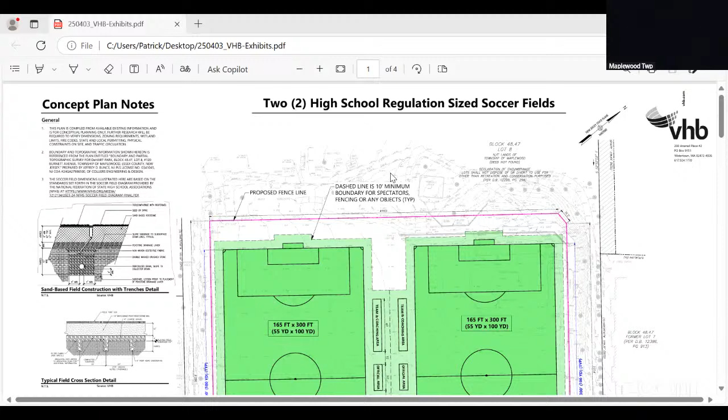I want to point out a few things with what we're proposing. The fence line that you see on the east, the west, and the south are all where they exist today, so none of that is going to change. The area that's going to change is up here where the softball field is.

There's also a perimeter drain that runs around the site. What's happening right now, following up on what Paul had mentioned, we looked at the existing soils. There's clay underneath, though there have been other projects that had rehab, repair the field. Once enough water gets into the clay layer, it has nowhere to go.

So what we're proposing to do is a drainage system that's going to run underneath the field. On the side here is some typical sections. Keep in mind, we're in a concept development stage, so none of these are completely engineered yet. There will be pipes, the size and the distance between each one, that's to be designed when we get into it.

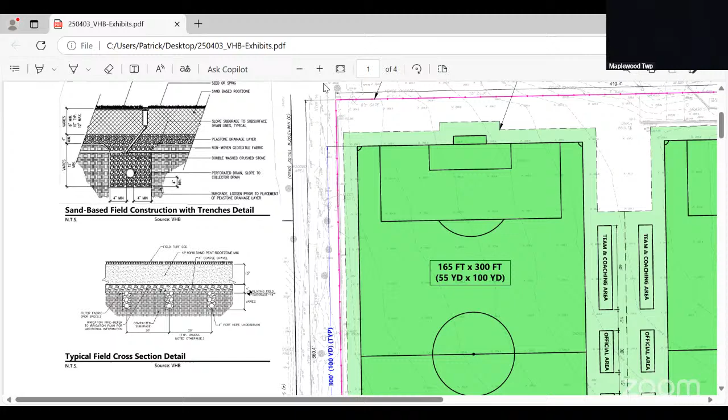So this is one of the typical cross-sections of what that would look like. You would have a drainage pipe surrounded by stone. This would be your irrigation line. So there will be trenches throughout the field that would have these pipes, and then we're going to have filter fabric, pea gravel, pea stone layer, and then a layer that would allow for the plants to grow for the root system.

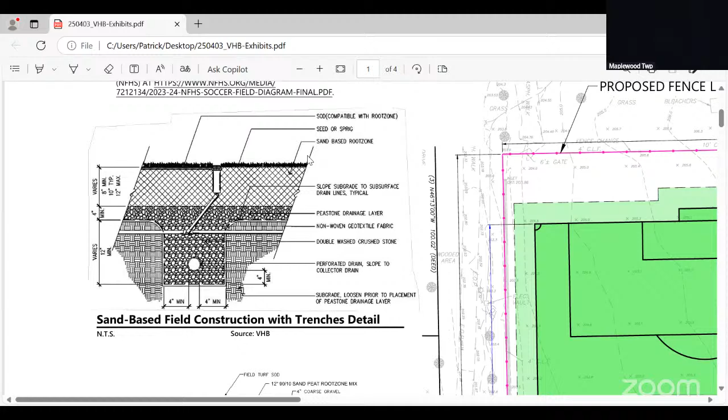Will these dimensions change as we get into the engineering design? Possibly, but this is typically what a lot of the fields that have drainage problems have. When I pass this off to Andy, he will tell you we have done this at a number of different places, all the way up to competitive Division I college fields. So this is by no means a new system that we are coming up with on the fly for this project. This is something that's been proven to work.

If you can scroll down just a little bit here, there will be a number of these drains. That's why you see three here, which is just a representation of a small area. There will be many, many more of these drains that will run in the field. And at the edges of the field, we will collect all of this runoff and take it to the existing municipal drainage system.

Once you get to the municipal system, it is no different than what it is doing now, whether it's flooding by overland flow or by any other means, it ends up in a system regardless. So we're not changing drainage patterns, we're not changing runoff. There's no increase in any impervious coverage as a result of this project. So it's the same amount of runoff, it's just going to get out of the field faster into the municipal system to where it is going now anyway. So that part does not change at all.

There is one of the stadium lights that we will have to move. That's just because it's by the existing dugout, which is going to be expanded.

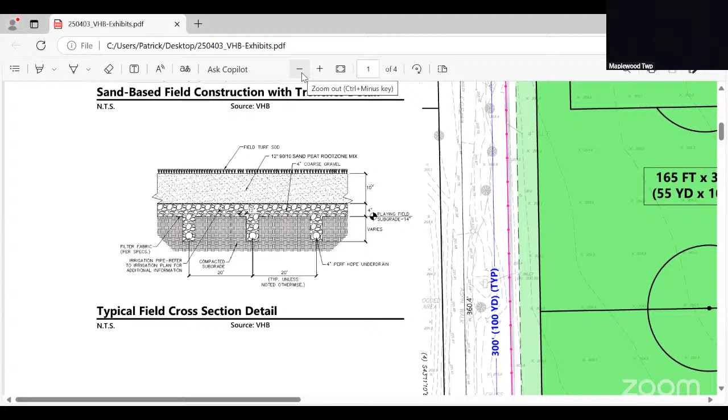So these two fields are laid out as high school regulation size fields. We have some buffer in the middle for coaches, for team area. We have some other possible layouts in the back that show you can have a larger field. You could even have just one large field down the middle. But this is just a graphical representation of what you could possibly do.

By no means are you bound to anything that we're showing here. At the end of the day, when we're done, this is going to be a big open grass area that could accommodate any use that you can fit within the space.

As far as the landscaping portion, I will pass it off to my colleague Andy to talk about his personal experience and some of the projects that we've done, and as far as landscape architecture goes, the grass and the need for it to rest. As Vic had pointed out previously, just because there's going to be grass growing when we're done with construction doesn't necessarily mean we want to play on it, because the critical time is for it to root down so that the following season, when we open back up, you will have strong grass in the field.

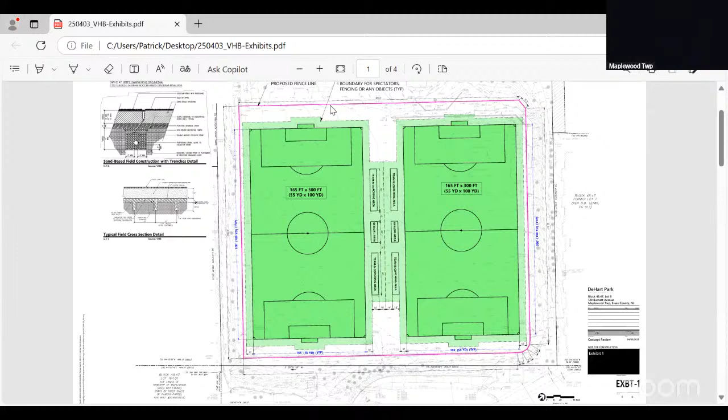Andy? Thanks, Joe. My name's Andy Sisson. I'm a licensed landscape architect. Hold on, Andy. All right. Go ahead. Okay, do you hear me now? Yep. Okay.

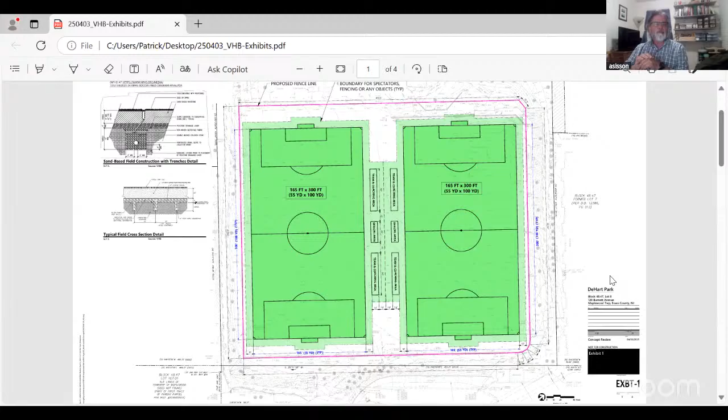My name's Andy Sisson. I'm a licensed landscape architect in Virginia. I've had the pleasure of working on a real wide range of field projects over my career, ranging from municipal multi-purpose field complexes, high schools, on up to Division I college fields. And yet the one thing that is kind of the one constant through all of those is, unless you get the part that Joe was just talking about right, it really doesn't matter what you put in that top 10 to 12 inches for root zone.

You can put the best system in the world in, and if the water goes through it and has no place to go, it's going to be soggy. And when it's soggy, grass gets torn up at a level that's below where it can recover from. So you may still have roots, but if you get down below the crown of the grass, it's not going to regenerate from those roots.

Whereas typical wear on a field, you're wearing it above the surface. It may look pretty beat up, but it's able to regenerate with a little bit of rest. And that's why it's important to be able to rest sections of the field and not have them in use 12 hours a day on a constant basis.

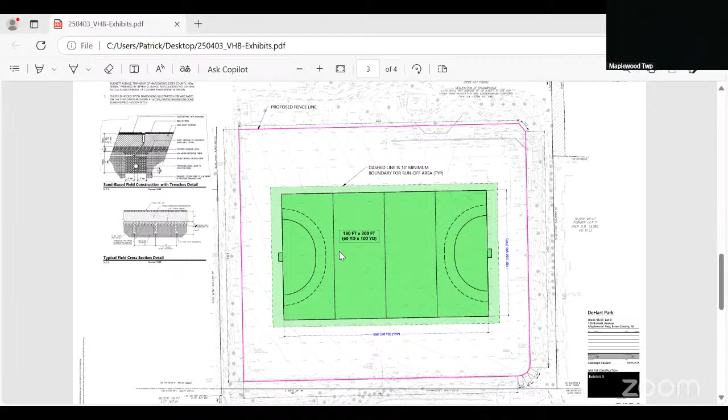Will you see trucks driving up and down unloading gravel? Yes, definitely, that has to happen - excavating, removing, transporting, construction of pipe, all of that will happen.

Now, when we're done with construction, there's a maintenance component. We won't be contracted for maintenance as engineers, but there are ways to test the soils at any interval regarding compaction - that would fall into Paul's purview within the DPW.

If I could add - for the soil profile, we'll use the lightest equipment we can at the last stage. In terms of drainage stone, that self-compacts once you place it, so it's more tolerant to heavy equipment.

For the soil profile, we want to use the smallest equipment possible to avoid compaction. If we do compact it during construction, there are ways to open up the pore space - core aeration, slit drainage, all sorts of ways to make it permeable again. The nice thing is that won't affect the drainage layer below, since that's not really subject to the compaction concern.

Okay, we're going to go to another question here. Hi, thanks for the presentation. I'm trying to be really calm.

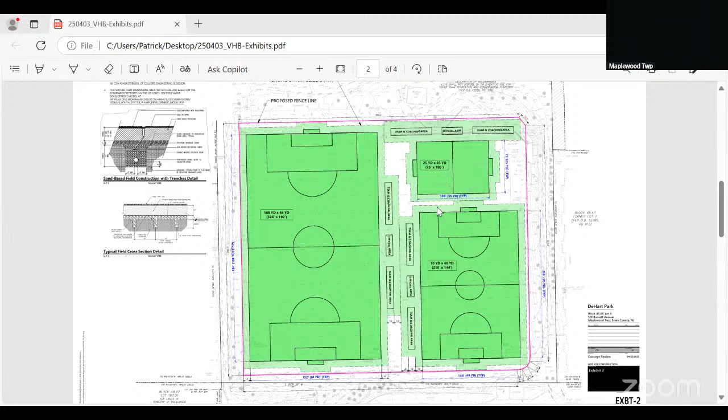Question back there. Yeah, just following up on that point, you said you're not changing the drainage pattern, but I heard it said at the very beginning that you're putting in all kinds of herbicides and pesticides. If that's going into the storm drain, going back to that question, where are they going? Aren't we putting in a massive amount of herbicides and pesticides, because of the efficiency of the system you're going to build, that haven't been there before? What's the impact of that?

That's one question. Second question: we've seen in the past situations where the township committee has to make drastic changes to budgets, right? We just lost $179,000 of federal funds. Is the township committee going to set aside money so that on a yearly basis the maintenance is taken care of and cannot be cut based on the whims of whoever may be in office?

And the third question: you mentioned droughts. We had a situation last year where we came close to having restrictions, and other counties and municipalities did have restrictions. What happens if we have a drought and we cannot use water in August? Is there an exemption that will be put in place after the field and grass are grown, so we don't lose this investment because of a drought?

I want to talk to the first part, at least, the herbicides.

Grasses that are not performing well typically open themselves up to weed growth, and that's where you'd need an herbicide. But our feeling is because it's going to be a higher performing field, there won't be as much need for herbicides because the grass will grow healthier, stronger, deeper roots. So the use of herbicides should decrease, and any application to the existing field right now finds its way to the same place anyway, whether through infiltration or overland flow. So they get there either way. Obviously we try to minimize the use of them, we try to use the least powerful herbicide possible to do the job, as it's in the ordinance.